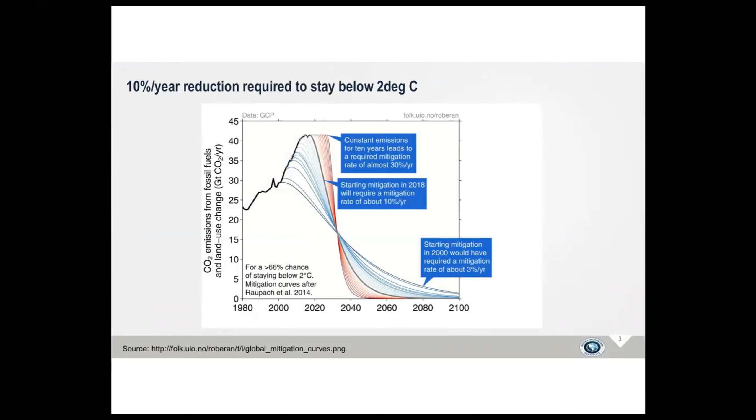So the next slide really was sort of a wake-up call from the International Energy Agency late last year, as they put out further details about what's the challenge ahead. And basically, if we're going to avoid the worst effects of climate change, we don't have the opportunity to build anything new. Specifically as that relates to campus, that would be including new buildings connected to the gas grid, new district heating with gas, or any other large new fossil fuel projects. That's the challenge ahead, is not dig the hole any deeper.

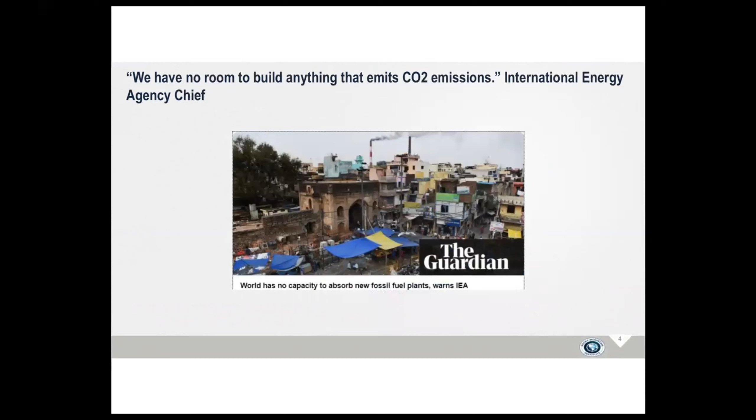So the next slide is digging into, and this is US focused for today. We do work around the world, but thought it would be helpful to focus my talk at least on the US challenge. This is from EPA, the amount of greenhouse gases from various sectors. The orange in the bottom right is buildings. This is just the carbon emissions, and I'll get to the other associated issue of methane in a minute. But as you can see, fuels in buildings, that is the burning of natural gas, fuel oil, and propane, is about 10% of US emissions.

The biggest piece of that is for space heating, but right behind that is water heating, and then cooking and other uses make up about 13%. This varies enormously across the United States. Obviously, a lot more space heating in cold climates, like in the Northeast and the upper Midwest. So this graph, for example, in California, where I am based, half of the fossil fuel use is for heating hot water, and a lot less space heating because our climate is much more mild.

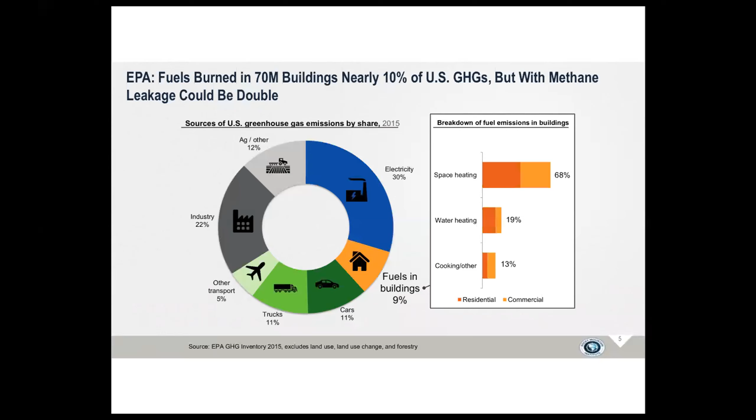But this gives you some sense of the national issue. Next slide. One that's often forgotten is that natural gas is more than 80% methane. And so methane is a super pollutant.

And I want to give an anecdote from Boston, where back in 2015, Harvard did a study that looked at the methane leakage from all the pipes. This wasn't associated with the burning of gas, but just the leakage. And they found just within the city of Boston, the equivalent of about 300,000 tons of methane emissions.

Well, what does that translate into? If you convert methane into carbon emissions, it's about 25 million metric tons of carbon equivalents associated with that methane leakage just from the gas distribution system in Boston. And that's more than the biggest coal plant in North America, which is the Miller coal plant in Alabama, which in 2017 put out about 22 million metric tons.

So just underscoring, as we're thinking about the urgency of getting gas in particular out of our buildings, there are two benefits. One is it reduces the burning, which has both climate and health impacts, but it also eliminates the leakage of methane, which by most estimates essentially doubles the climate impacts of natural gas. Next slide.

So here's a sort of summary, thinking about this problem holistically, systemically. In the United States, there's about 70 million buildings that are burning gas, oil, and propane. It's about 550 million tons of CO2. There's a huge network of pipelines that carry this gas, and they are leaking from the wellhead where it is produced all the way to the homes.

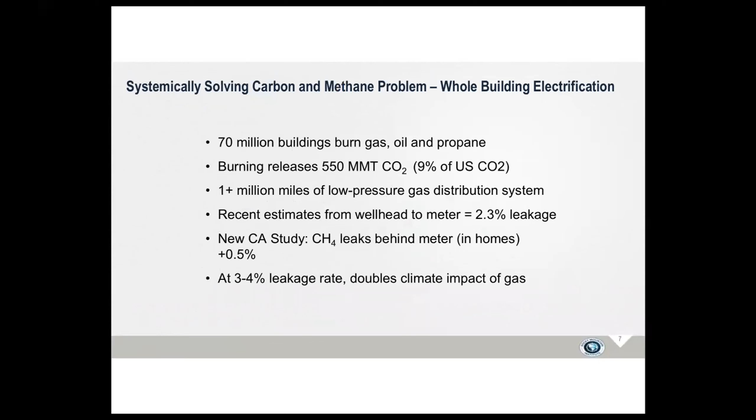So the thing about the building sector is that its situation is actually getting worse. The good news in the United States is that there's part of our economy that's actually been making enormous progress. Over in the electric sector, we have been replacing coal with clean energy at a greater rate than any other sector in the world. US emissions in the electric sector are down about 26% or 700 million metric tons.

And coal plants, despite what the current administration in DC is trying to do, continue to retire at the rate of every 20 to 30 days. So every 20 to 30 days since this current administration took office, coal plants have been retiring permanently and coming offline. And so the electric sector is getting cleaner at a very nice clip as wind and solar gets installed at record levels. Not so with our buildings.

Building emissions, the burning of fossil fuels in buildings, is up last year 10%. And in part, that is because we are adding new buildings, and the default in most places is gas. And we continue to install record amounts of gas appliances, as this slide indicates, about 4 million gas hot water heaters, versus the much cleaner, much more efficient electric hot water heat pumps.

So right now the situation is going in the wrong direction, and that's why I'm excited to be part of this webinar, really focusing on the need to be thinking systemically about how do we get gas out of buildings and electrify them. So let's jump to the next slide.

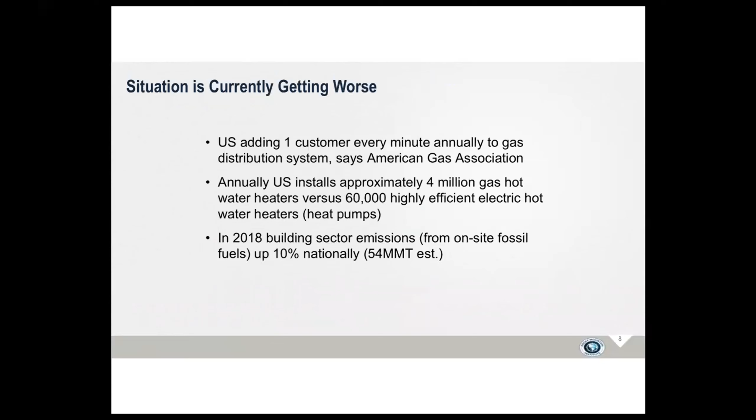So while not specifically focused on commercial or university buildings, RMI last year did a study that really tried to answer a couple of questions. One is, what are the carbon benefits of electrifying? In the days of old, when coal made up 50% of our electricity, it was a much more difficult question. Does it make sense to electrify?

And that question was even more complicated when we had inefficient electric technology a decade ago, when the answer was it probably didn't make sense to electrify 10, 15 years ago. Today, the economics, the technology, and the opportunity are fundamentally different and better. And this report lays out that the carbon benefits are good everywhere. Next slide.

And that the opportunity to electrify end uses, that is replacing fossil fuels in our buildings, offers huge opportunities across the entire United States today. And the second piece, just to note, is that obviously if we are adding new electric load through our buildings, it has a profound impact on the electric grid.

And how we manage this and how we think smartly about integrating new electrical load through grid interactive buildings is both critical to manage it, but also offers huge opportunities to integrate significant amounts of wind and solar. If we think about buildings as batteries and the storage opportunities in, for example, hot water, there are profound opportunities to actually have buildings be an enormous enabler of adding more clean energy.

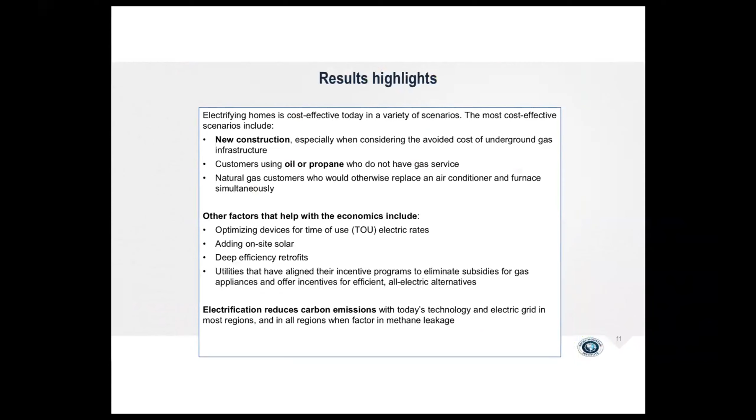And then the last point is important, that electrification makes sense everywhere today in the United States. Replacing end-use gas, oil, propane with clean electricity from a carbon perspective is great today, and it's only going to get better as we continue to retire coal and replace more and more of it with clean energy.

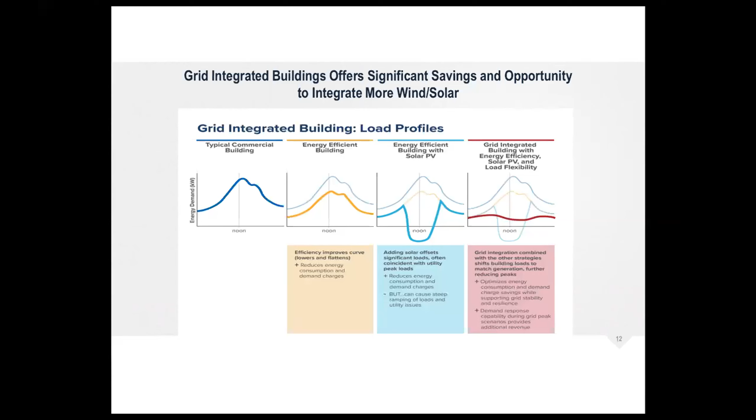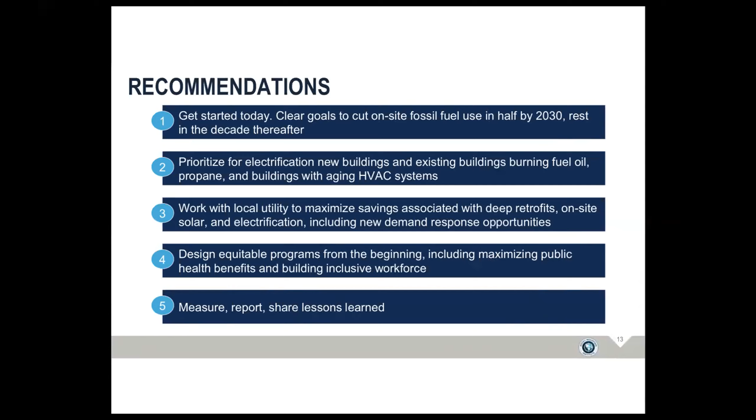Architecture 2030, for those of you that don't know us, we're a small, flexible think tank that focuses on rapidly transforming the global built environment from the major contributor of greenhouse gas emissions and climate change to a central part of the solution. We've been around now for about 14 years as a nonprofit led by our founder and CEO, Edward Mazria, renowned architect and educator. I want to start at the global perspective and then get down to the campus level that you're all working at.

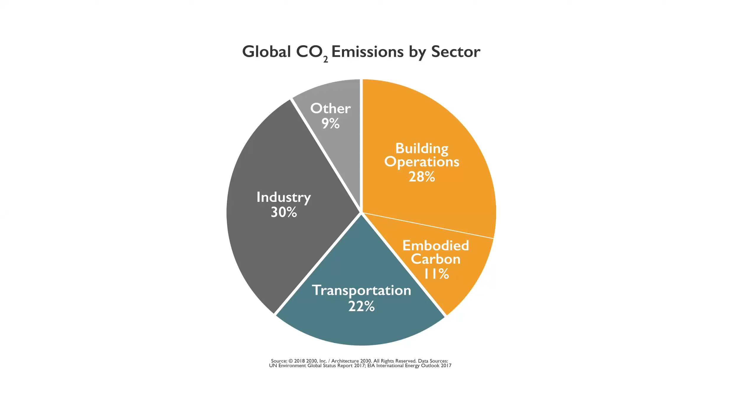In a broad sense, if you look at major industry sectors across the globe, buildings are the largest chunk. When you consider building operations and the embodied carbon associated with building materials and construction practices, it is larger than any other industry globally in terms of its emissions profile. And when we look at the building sector itself, annually, building operations, which is what we typically focus on and what we're talking about in this webinar, is about 3/4 of our emissions profile annually.

But embodied carbon to create our growing building stock, which we'll talk about in just a moment, is also a very significant piece. I know it's outside the scope a bit from this conversation, but it's important that we recognize, as all the new growth is happening, the embodied carbon of materials and construction practices is also a critical piece. And as we decarbonize our operations, it will be the entire building sector's contribution to climate change.

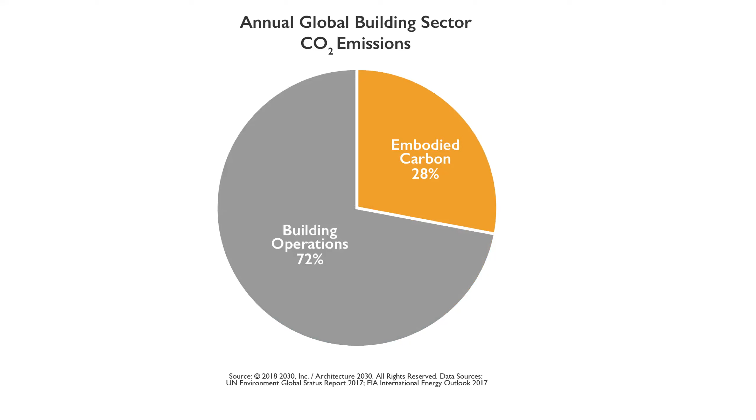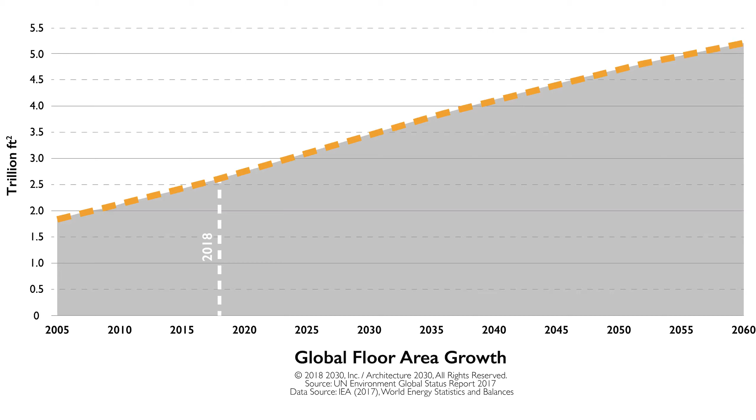Bruce mentioned a bit about the growth in the U.S. The global growth is gigantic as well. If we look at the global building stock now through 2060, we're adding essentially a New York City every 35 days for the next 40 years in terms of equivalent building stock. We're essentially doubling the existing building stock of the world in a 40-year period. That's pretty mind-boggling. It makes us recognize that making sure we don't add to that emissions problem from the building sector, as Bruce said, is absolutely critical if we're going to meet our carbon goals.

And you can think of campuses in the same way. Many of you are probably experiencing growth in your campuses due to the influx of urban population globally, and this will be an issue for you as well. So there are really three main pieces in the building sector that we need to decarbonize. One is new buildings, given the mass amount of global growth. Then we still have about 3/4 of our existing building stock that will be around in 2050 that need to get retrofitted. And then, on new construction, how do we create zero carbon or carbon sequestering materials and construction practices?

I'm going to touch a little bit on these three topics and we'll get into more details about electrification as we go forward. In terms of operation, it's pretty straightforward. We recognize that buildings will use energy. There's this concept of zero energy buildings, and that's a technical term that has not been used appropriately in terms of what it really means. They will use energy. They just happen to produce all their own energy on site, for example, and don't pull energy from the grid. But buildings will use energy, and it's important that we recognize where that energy comes from.

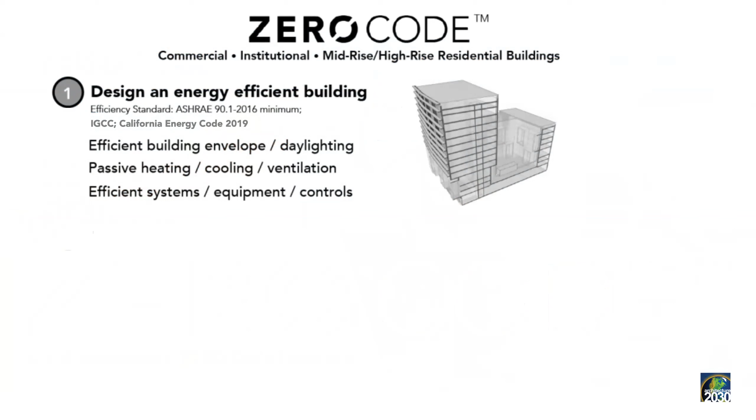So we recently launched something called the Zero Code, which is a standard for jurisdictions to adopt, and universities and campuses could also adopt this for new construction, that says essentially two things. One is follow the best energy efficiency codes currently out there. There are a number of standards available. ASHRAE is the current leading standard that is globally applicable, and they have a new standard that came out in 2016 that sets the energy efficiency portions of the buildings. So that can remain the highest standard, but the inspiration of the Zero Code is that the remainder of all the power of the building is supplied not just on site, but also through offsite procurement.

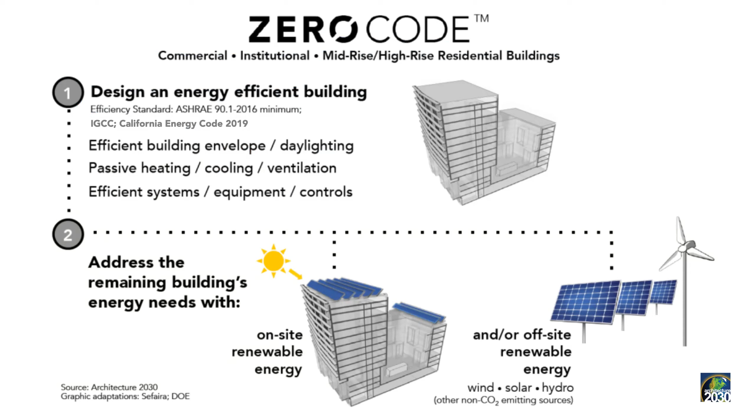Now, Bronte and I were speaking in preparation of this webinar. I think there's a growing recognition that on-site renewables and even on-campus renewables are potentially not enough to power our building stock, especially as we electrify the natural gas consumption for heating, as Bruce mentioned, that we're going to be taxing the grid. And so we need to be coupling our electrification efforts with on-site renewable and off-site renewable procurement. And there's a lot of really great progress being made on that front in universities and campuses throughout the US and globally.

Now, in terms of existing buildings, there are thousands and thousands of incentive programs across the globe in order to encourage energy efficiency. Primarily, as Bruce mentioned, most of these programs aren't necessarily encouraging electrification, although many are changing that. But thousands and thousands of programs, and unfortunately, we're only upgrading our existing building stock by 0.5% to 1% each year annually. And you just do the math over the next 30 years, we're only reaching 1/3 of the existing building stock.

So what really needs to happen, and what we're starting to see, is policies and regulations being adopted, typically at a municipal level, but also at a state level, that really changes the game of how we approach this. It's not specifically to energy efficiency upgrades, but really energy upgrades as a whole, which include energy efficiency, but also renewable energies on site or off-site procurement and electrification.

So we're going to see more and more of these kind of policies coming up, and we really need to use the intervention points that we have in the building sector, like typical renovations and accelerating those to deep renovations, sales of buildings, and having energy upgrades apply there, so that we can get up to 3% of our existing building stock renovated each year to these standards. And if you do that math, 30 years times 3%, then you get the majority of the building stock covered with these interventions. But right now, the policies and regulations, you can count them on one hand globally that exist in this sphere, in this direction.

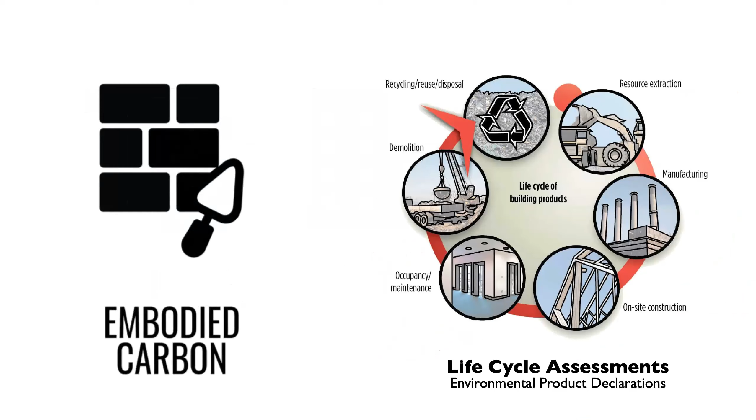And then the one, again, that is a little bit outside of the scope, but important to always remember, is that embodied carbon piece. And just a short segue on this is that we typically approach this through an entire life cycle assessment of our products that we use in building construction, from raw resource extraction through manufacturing, on-site construction, and demolition. And that's a time-intensive process given how many building materials we use in our individual buildings.

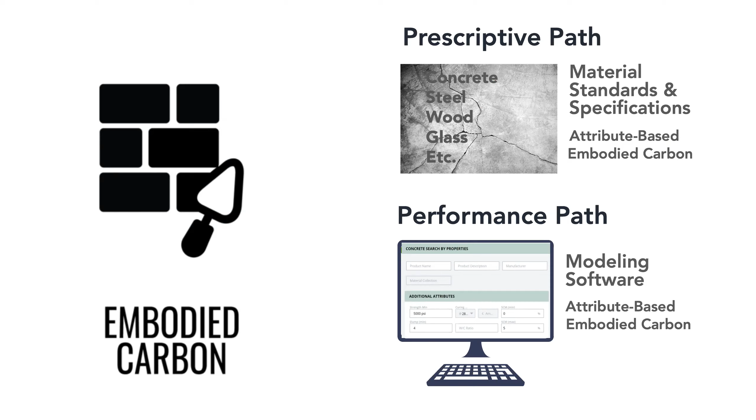So we really need to take the same approach that we do with energy efficiency, where we provide not just a performance path where we do that modeling and understand the full life cycle, but also prescriptive paths, so that campuses and universities, as you build, understand what kind of concrete, what kind of steel, what are the big carbon intensive materials, how do you just select better materials? What does low embodied concrete look like? What does low embodied steel look like?

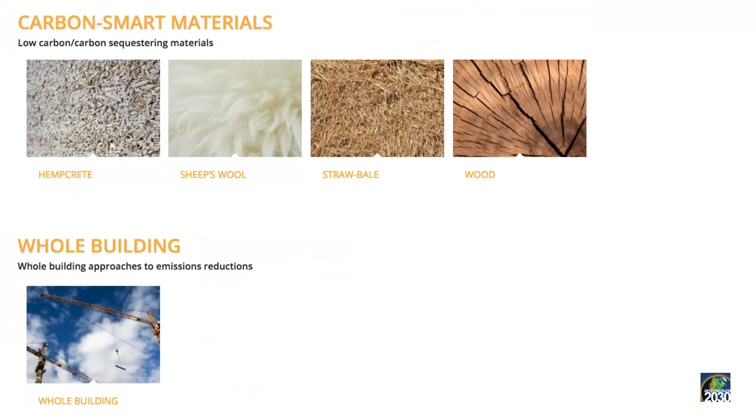And last year we put out a carbon smart materials palette to do just that from a design perspective. And we focused on the heavy hitting materials usually in the core and shell of buildings. So it's a resource for you, again, outside of the electrification scope, but just as critical as we start to decarbonize building operations. So that was just an overview quickly of the whole building stock globally and the areas that we need to focus on, but I'll talk specifically about the ideas of electrification here.

Bruce mentioned some of these statistics earlier, but if we look at U.S. building energy consumption by fuel, we see that it's almost half and half when you consider fossil fuels on site versus electricity consumption in a building. And this typically gets left out of the conversation, whether that's a campus or a city, when we talk about going 100% renewable. There's a lot of commitments out there about 100% renewable, and for the most part, what they're really referring to is 100% renewable electricity.

Most of those conversations leave out this big chunk, half of this pie, on the on-site fossil fuel use, predominantly natural gas. So I'm really excited that Bronte and Environment America and this program are looking at the natural gas issue in existing buildings as a major focus of being 100% renewable. It means not having those on-site fossil fuels, as well as having 100% electric from renewables.

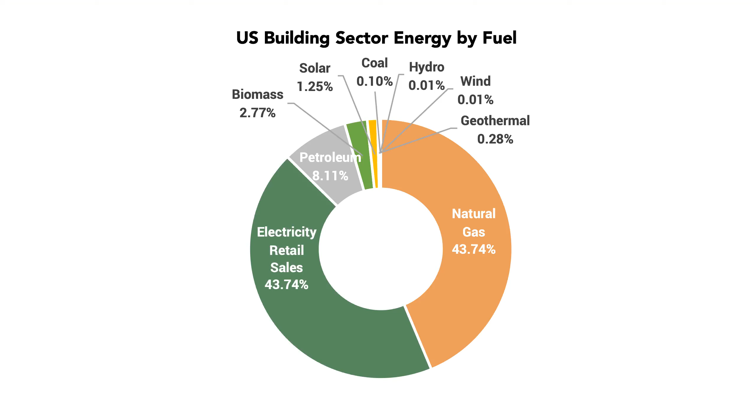But if we look at the emissions profile, that was just energy consumption. The emissions profile is actually slightly different, and I appreciate Bruce's focus on the individual systems, which we'll get to. But overall, for the building sector, electric power is still the predominant emission. That doesn't mean we shouldn't focus on natural gas. As I said, it is absolutely critical. Half the energy use is natural gas.

But we have to also recognize that as a country, the majority of our electric power is still fossil fuel and much more intense than the use of on-site natural gas. And to some of Bruce's points, this doesn't take into account things like the methane leaks that he brought up, which would really shift this probably back into more of a half and half kind of approach.

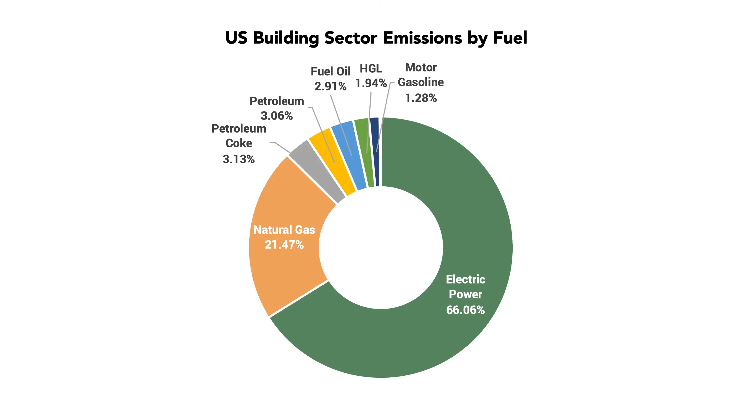But it still recognizes that we have to do both. We have to do electrification, get rid of on-site fuels, and we have to clean the electric grid at the same time. So I think that's an important perspective as you work within your campuses.

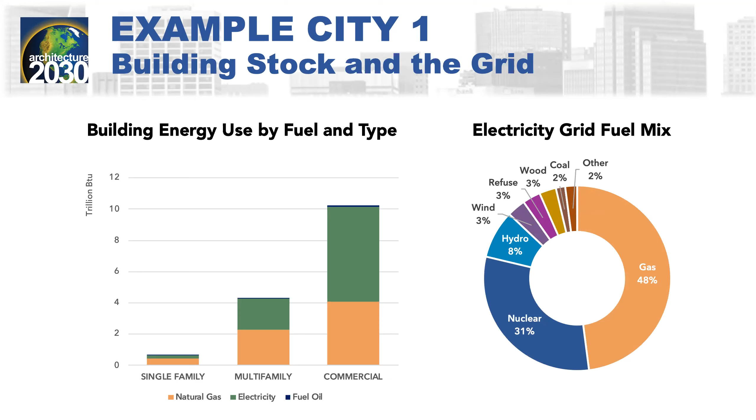We do see commercial buildings tend to use more electricity than natural gas, even in colder climates, but there's still a predominant amount of natural gas. And the electricity grid in this city happens to be about half fossil fuels, and the other half is from cleaner non-emitting fuels. And what's interesting about this, though, is when you look at it switching from energy to emissions, you see, again, a different focus here. But sorry, one more comment, which is that this city is predominantly made up of campuses.

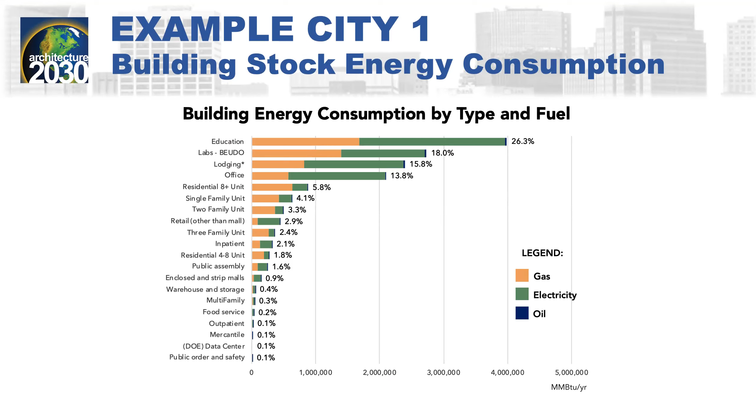So this is a breakdown of the energy consumption by building typology in this city, and you can see the importance of getting campus facilities that include those top 4 sections, really the top 5. Educational buildings as a whole, laboratory buildings, which is a big part of campuses, lodging, and 8+ residential units are essentially your dormitories, and your office space. So we can really think of this city as a campus, and the campuses within cities in certain areas are the majority of the building stock. And so it's really important that campuses lead this effort to decarbonize and to look at electrification.

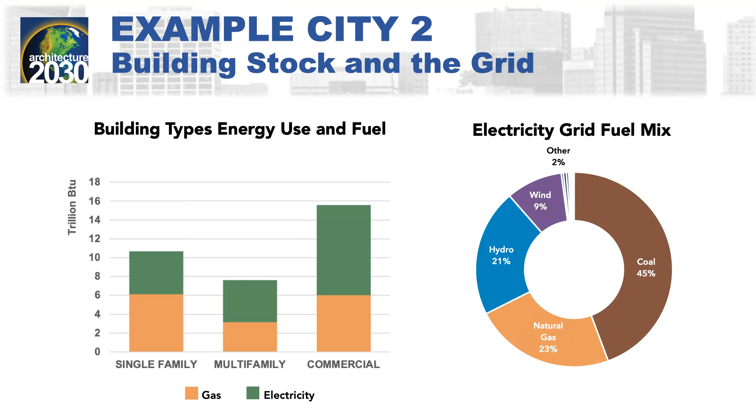We look at a second city, this is more of a marine climate. So the natural gas use is down. This happens to be a lot of single family in this city. I'll go through this a little quickly since you've seen it before, but again, this is actually even dirtier of a grid. You can see how much coal and natural gas are a part of the electricity grid here. And it really does start to shift the picture in terms of emissions for these buildings.

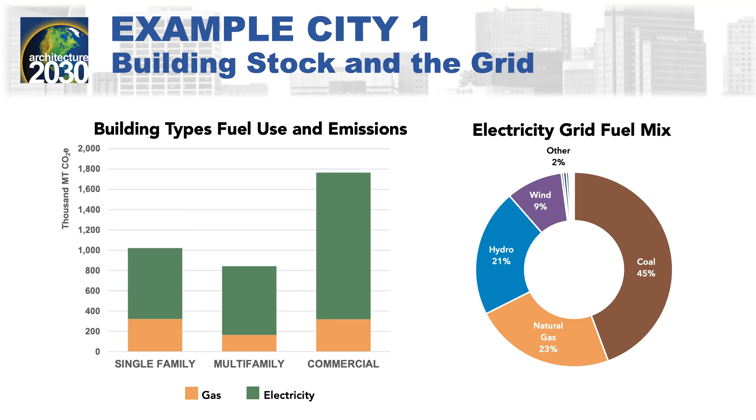Now that said, we have to go to zero. So even in these buildings where it doesn't appear from an emission perspective currently that their natural gas is a huge portion of their emission profile, it is still a significant amount and requires it to be phased out over time. So it's important that we don't add new buildings that can increase the natural gas emissions, as well as transition our existing buildings in this way. And again, this is just the split of building types. In that case, the city was not heavily dominated by campuses.

So I just want to show you some examples of some of the other cities, and I think you'll start to see a trend here. These are all more heating load dominated cities. So they're colder climates. You'll see a lot of natural gas use by energy. And it actually matters about the building type as well. You'll see single family residential, which is the SFR in the first column for each city, is almost 3/4 natural gas use, and that's all mostly heating, whereas commercial buildings tend to use more electricity. So the strategies will depend on building typology as well in terms of how it's prioritized, but it's still a significant portion in all cities.

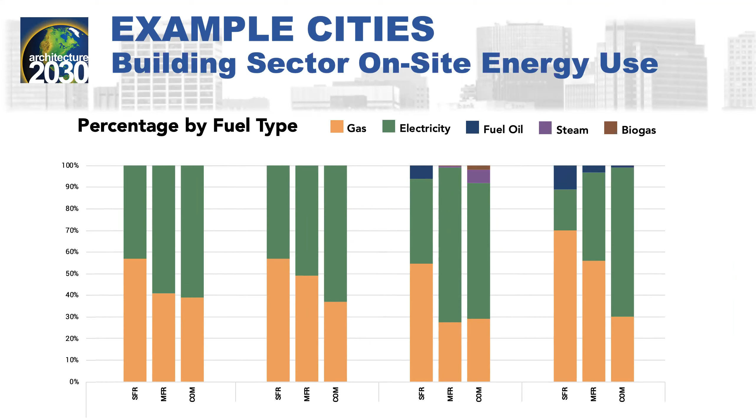Now, the most interesting one is the third one here I wanted to show you. You'll still see a lot of natural gas being used, half of it in single-family residential, about a quarter in multifamily residential and commercial in terms of energy consumption. But we're going to look here at the grids of these different cities.

So I wanted to show you just an example of the transition. We'll see very, very quickly that most cities and campuses, as they start to do renewable power procurement or on-site generation of renewables, will look like the second to last city here, whose main focus is decarbonization by pulling out natural gas and replacing it with electricity use. So I'll stop there.

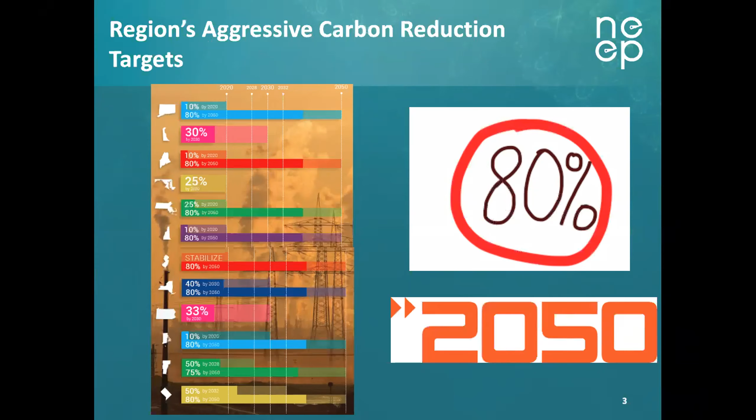And so this is just another view of this question about, aren't we on the path to 80% carbon reductions? And the point of this is that even with continuing to do energy efficiency and getting to a clean grid, you're really halfway there. And again, this is at a regional New England and New York view, but it's very applicable at the city and even at the campus level.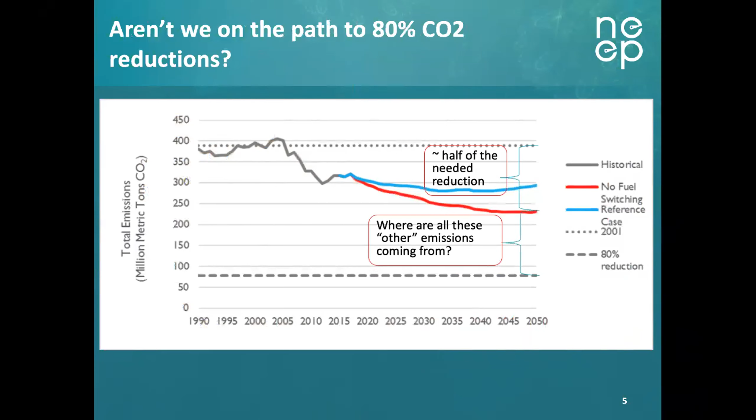So next slide. Question is where are all these other emissions coming from? And as you've heard, next slide, they're coming from the direct use of fossil fuels. And I know we're talking about buildings today. Obviously, transportation makes up a big piece of that. So that's a huge opportunity, at a regional level, at a national level, but should be part of the mix as part of your focus at the campus level as well.

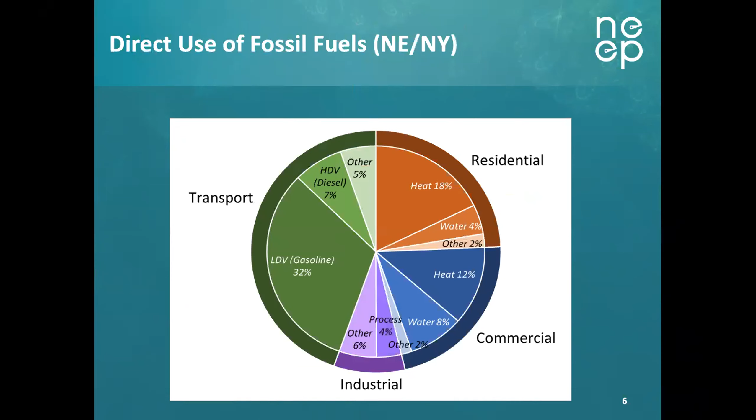And so today, at least looking at the residential and commercial side, as has been mentioned, space heating and water heating really dominate the direct use of fossil fuels in buildings. Traditional furnaces and boilers being fed by natural gas, fuel oil, propane. Those are the existing technologies that dominate the market today. Next slide.

So looking at, sorry, what are those alternative advanced electrification technologies? And certainly on the transportation side, people are familiar with electric vehicles, more so on the light duty side, but certainly more work happening on the trucking side and heavy duty.

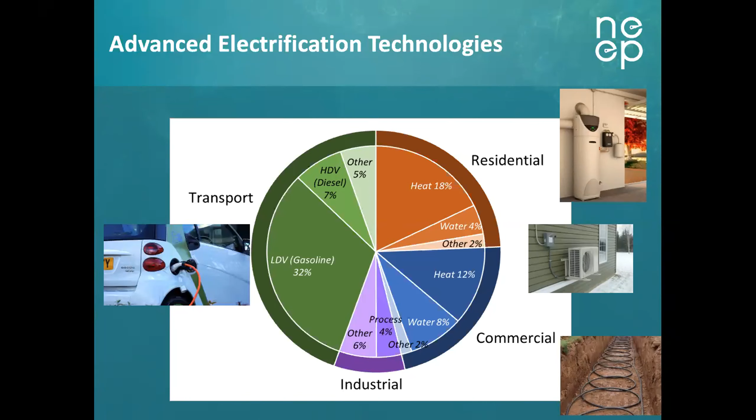But back to the buildings, between heat pump water heaters on the water heating side, to air source heat pumps on the residential and commercial side, and ground source heat pumps being some of these new alternative technologies that could replace the traditional heating systems that homes and businesses and campuses are used to deploying. Next slide.

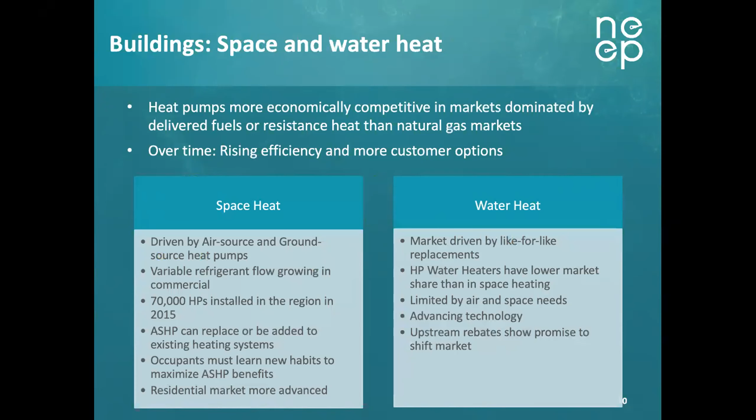This is just a little bit more detail on some of the air source and ground source technology. I don't think we need to spend too much time here. The one note is the economics, at least in the Northeast, are better in the delivered fuel analysis versus the natural gas, but that certainly does not preclude, particularly in new construction, sometimes the economics can be very favorable even today for natural gas alternatives. Next slide.

So just pulling forward a couple of examples of campuses that have implemented some exciting projects. This is a note on Ball State, really a massive ground source district system. There are a couple of main well fields that feed into a district system that feeds 47 buildings and 5.5 million square feet. So this technology is here today and delivering results today. Next slide.

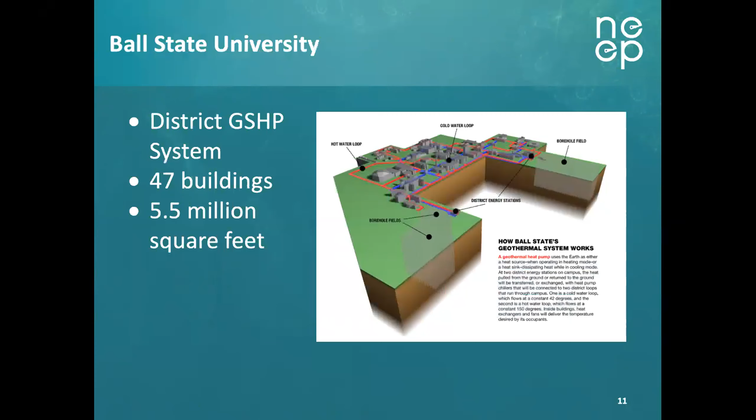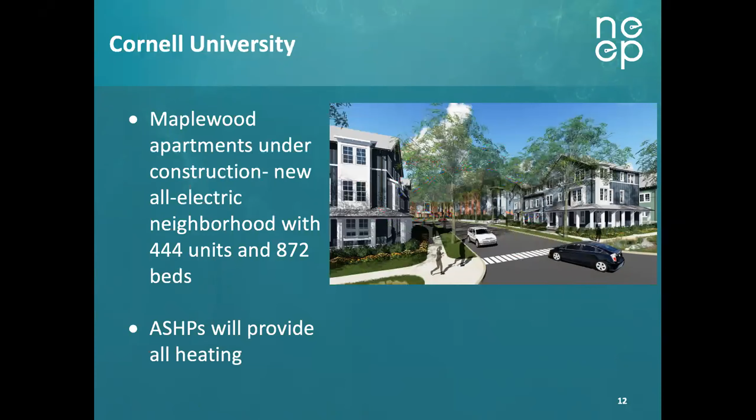Cornell University. This is highlighting a development that's under construction. This is going to be essentially a living lab that will be looking at the grid impacts of air source heat pumps and opportunities to manage the operation of air source heat pumps in a colder climate. But again, this is moving from very small pilots to really large developments, and this is an all-electric building without gas. So it's really demonstrating that the suite of technologies we have today can meet the needs of college campuses. Next slide.

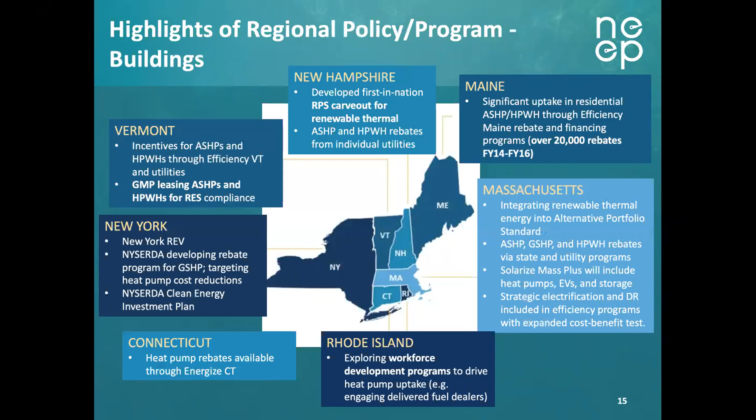There's certainly potential cost savings, but comfort in the buildings, local and global health is certainly related to these. These buildings can be far more resilient, particularly on the energy efficiency side. And as we know, at least in the Northeast, with recent gas line explosions, there's certainly some safety opportunities to improve on campuses. So next slide.

So I'm finishing with this point, really driving the point home that as you are thinking on campuses about how to achieve these long-term decarbonization goals, this idea of building electrification needs to have its place alongside energy efficiency and renewable electricity goals. So I will leave you with that and take any questions if they come along.